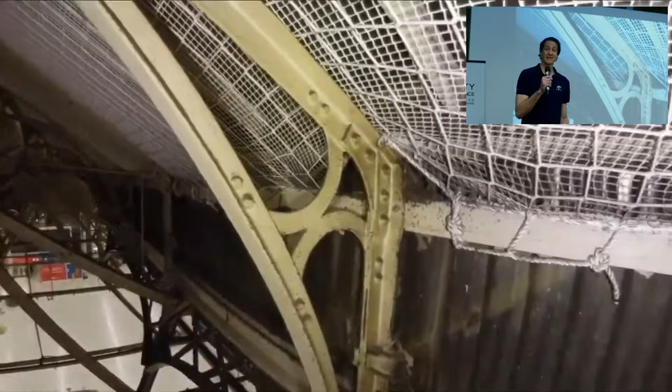This is just an extract from one week on LinkedIn, where some of you have been sharing how you are mapping historical sites like Alcatraz, doing landmark missions like in the Victoria train station, or doing all sorts of industrial inspections like inspecting boilers, the internals of wind turbines, inspecting shafts, and of course building digital twins of various assets, exploring tunnels, mapping out cavities and mines, and even in mines doing some pretty impressive missions doing the rescue of mining equipment that got stuck. You have been helping out in the collapse of a tunnel, inspecting sewers, or tunnel storm drains, or penstocks, and so many more things.

You are truly Flyability fans, and you are our heroes, because every day you are doing critical work. You're keeping safe infrastructure that all of society uses and is crucial.

So, big thank you. Over the last 10 years at Flyability, we've shipped more than 2,000 confined space drones, starting in 2016 with Elios 1, which was really a one of its kind. We introduced the first commercial drone that can fly indoors and collide into things and survive collisions.

Then we brought Elios 2 with a step change in ease of use and in terms of capacity to inspect as well. And then Elios 3, 2 years ago, with a big promise that it was a platform that we would keep building on top of.

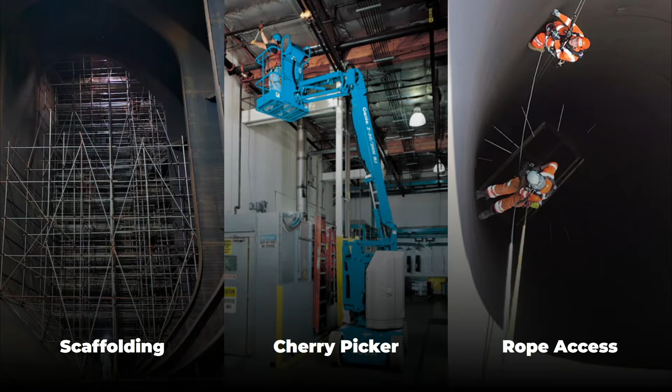So why bring UT on a drone? That's an easy one. Measuring the thickness of metallic plates or metallic components is the most requested data after visual inspection for the inspection of so many critical assets. And today, that sort of inspection requires work at height, building scaffolding, using cherry pickers, doing rope access. Here, with Elios 3 now having ultrasonic testing capabilities, and of course visual inspection capabilities, we are really bringing the ultimate inspection tool to many industries, like in the maritime industry, oil and gas, chemical, power generation, and so many more. We really believe we'll revolutionize many use cases.

Why UT on Elios 3 specifically? Well, Elios 3 is designed for contact. It's been 10 years we've built drones that survive collisions, that can handle contacts, which is really, really hard. And UT is a contact activity. So what is hard for most conventional drones is really natural for Elios 3.

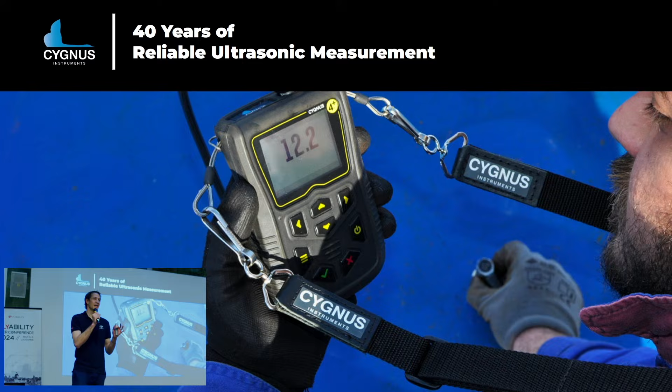This product would not have been possible without the amazing partnership with Cygnus. Cygnus has 40 years of experience in reliable ultrasonic measurement, and we collaborated very closely with them during the entire development to bring high precision, high reliability ultrasonic testing on this product. So thank you, Cygnus, for this amazing partnership and the years to come.

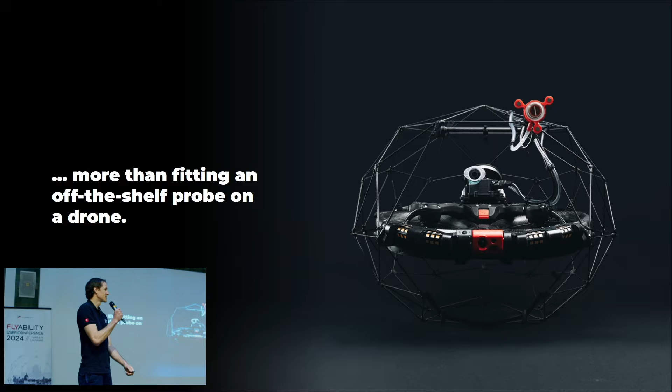Now, let me tell you, just zip tying a payload, a handheld probe, onto a drone is very easy. But making a product that allows you to be safely on the ground and feel like you're up there taking a UT reading, and be very efficient at that, is very, very hard. A lot went into this product, and so that's why I am super excited to welcome Stefano Zampieri, product manager for the UT Payload, who will tell you more.

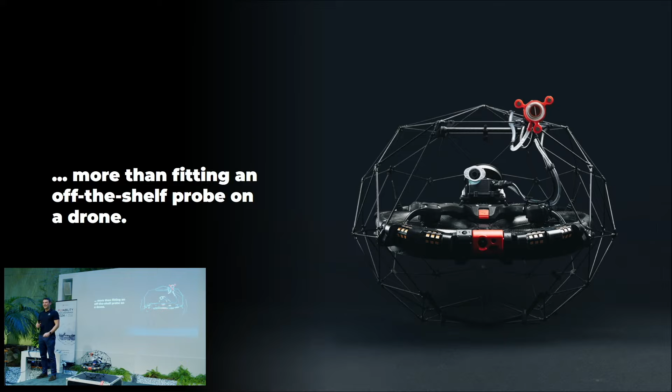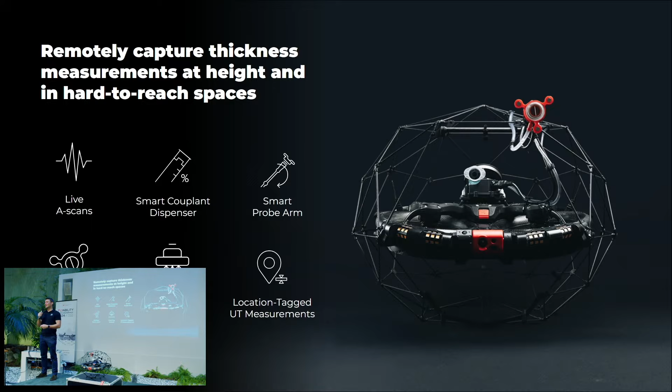So as you understood today, we are giving you the possibility of taking thickness measurements in confined spaces. So as Adrian mentioned, Elios 3 is a contact drone. It's very good at doing its job. But on top of that, we developed 6 main features that will allow you to perform flawless UT inspections. So I'd like to dive into each one of those features with you so that you understand a bit more what they are.

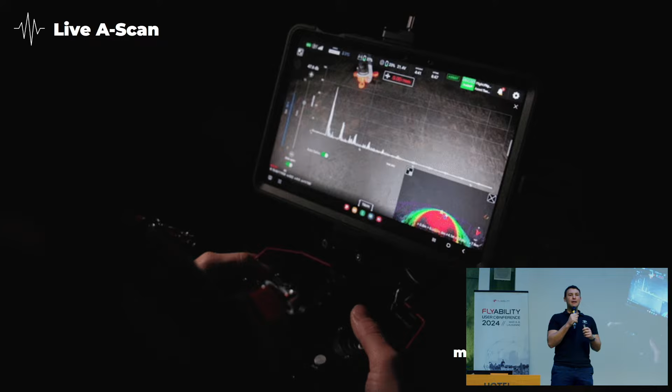So as a UT inspector, the most important point that you'll have is to make sure that your measurement is correct. So 5 years ago, when we started to fly our first prototypes, we realized that just a simple digital reading is not enough to trust your measurement. That's why we are sending 8 A-scans per second to the piloting screen so that the pilot can assess the validity of the measurement.

So it looks like this in real life. So we have the A-scan overlay on the piloting screen. We have the digital reading on top of the A-scan up there. And if you want to go further, you can even use the manual gates and gain to adjust and refine your measurement if needed.

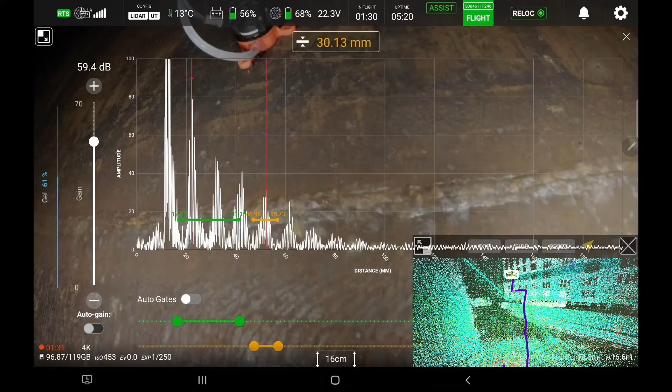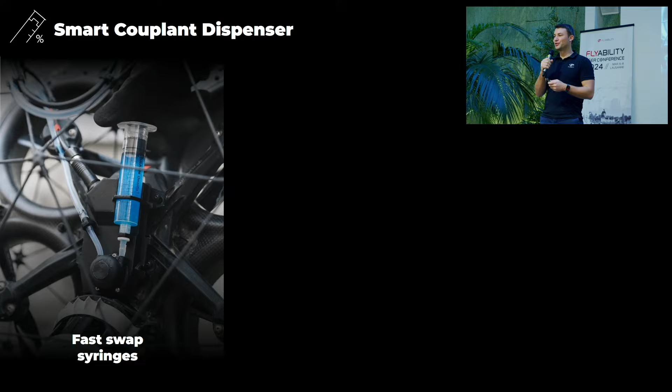So to get an A-scan at all, to start with, you need coupling. Coupling is an essential part of UT operations. And that's why we developed a smart couplant dispenser that is made of 3 main components. So fast swappable syringes to minimize downtime in between flights when you refill your tank. We also have a gel gauge on cockpit. So while you fly, you always know when it's time to come back and refill your gel.

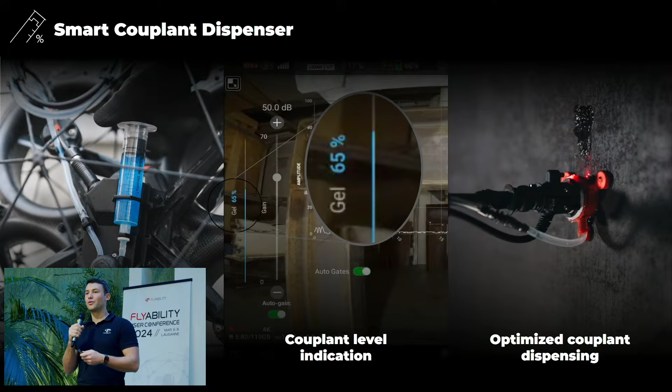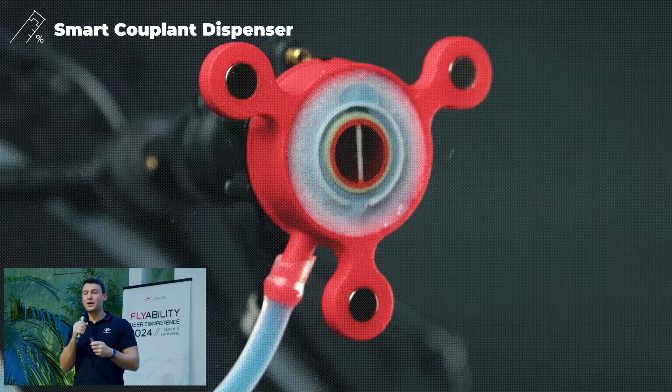And an optimized couplant dispenser, which, when you fly a drone, most of the time the drone is up there. You need to trust how the couplant is dispensed. And that's why our brilliant engineers developed this smart and very efficient system, which is just a lip around the probe that forces the gel in one direction to remove air bubbles and debris from the front of the probe.

When you use this tool, you will not only want to take measurements on vertical walls, you'll also want to take measurements on ceilings and floors. So that's why the probe can be mounted on top, in front, or below the drone for all those situations.

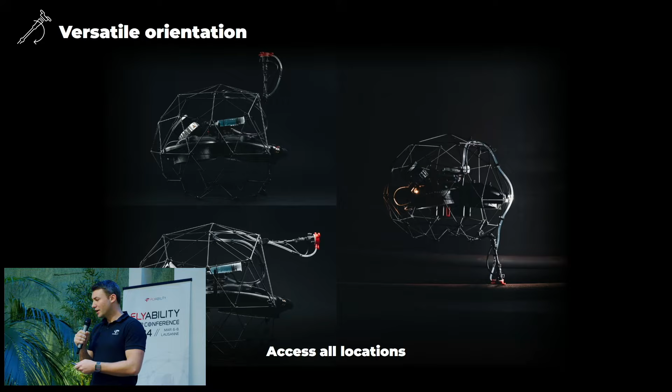But you can go further with this tool. For example, here you see a drawing of a pipe rack that one of our engineers made in the field. And in this situation, you need to take measurements in between the pipes where it's very tight. The drone cannot fit there. So you can shape the arm of the drone in different shapes to access all the inaccessible points that you'd like to take.

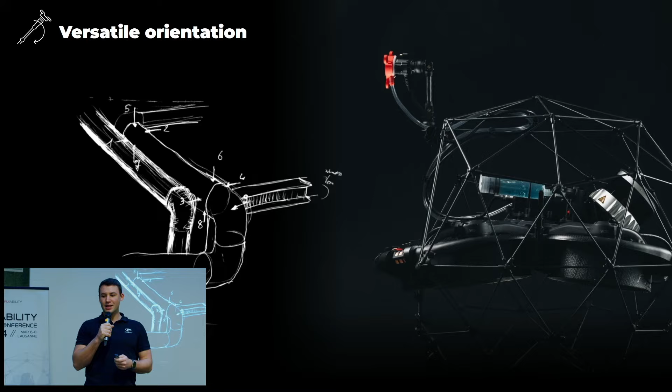We also added a laser in the probe. So, as a pilot, you can only look at your piloting screen and you don't have the perception of depth. But the laser creates a reference point on the wall that can be used by the pilot to adjust the position of the drone and hit a very, very precise target. You can see here how precise it can be.

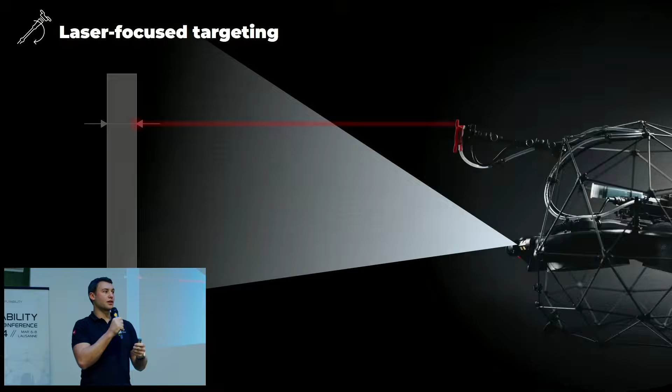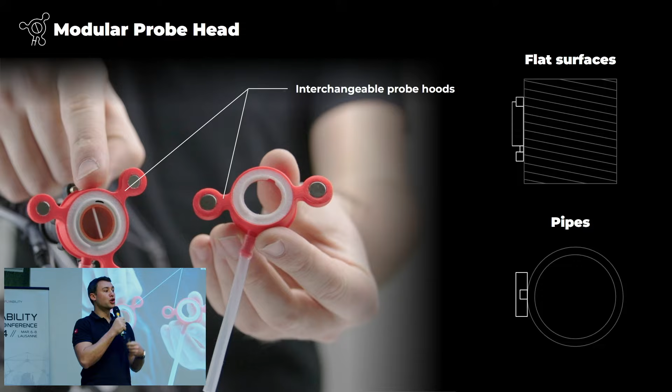So, you'll not only have pipes in your assets, you will also have flat surfaces. And that's why today we'd like to introduce the concept of interchangeable probe hoods. So this part goes around the probe and adapts the probe to the surface you want to measure. For example, for flat surfaces, you want a hood with 3 magnets that keep the probe very stable against the surface and perpendicular to the surface. For pipes, you want 2 magnets so that the probe is aligned with the axis of the pipe.

But today we are not only launching probe hoods, we're also launching interchangeable probes. For situations where you have thin walls or small pipes, you want to use the 7.5 MHz probe, which is more adapted for those situations. For general use, you have the 5 MHz probe. And for rough conditions where thicker walls or dirtier surfaces are there, you want to use the 2 MHz probe, which is more powerful.

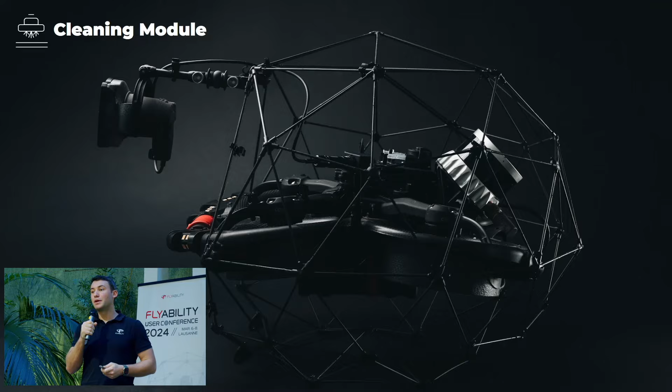But sometimes surfaces can get even dirtier than that, and the 2 MHz probe is not enough. In those cases, we have the cleaning module. The cleaning module is a metallic motorized brush that was optimized to be carried by Elios 3 and can be plugged instead of the probe on the drone, and then you can fly to your surface, you brush for a few seconds, and that's how it looks from the other side of the wall, and then you detach and it leaves a very clean spot ready to be measured.

I like this picture because it shows how thickness measurements today are noted, marked on the assets. It's very efficient and simple. However, this can be erased, and when I look at it, I have no idea when the measurement was taken.

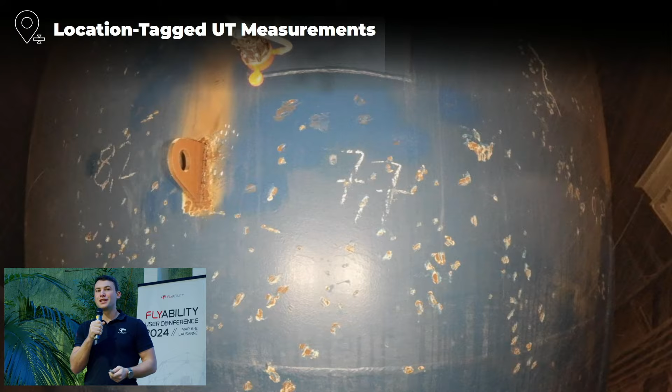So from today, you can mark digitally your measurements on the 3D map that Elios produces, so that you can come back even 2 years later on the exact same spot and compare your measurements.

The fact that Elios 3 can carry both LiDAR and UT also gives you a big advantage that we call situational awareness. So when you fly for the first time in your asset and need to take a measurement, for example, on a stiffener on the roof, well, all the stiffeners look the same, so only from the camera, how do you know you're on the right one? You can zoom on the map on the piloting tablet and make sure the drone is aligned with the right stiffener before taking your measurement.

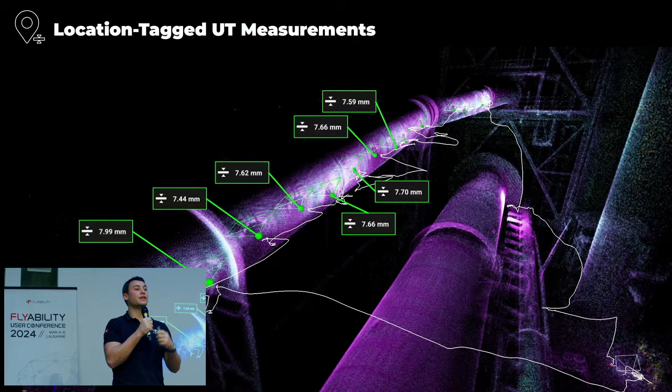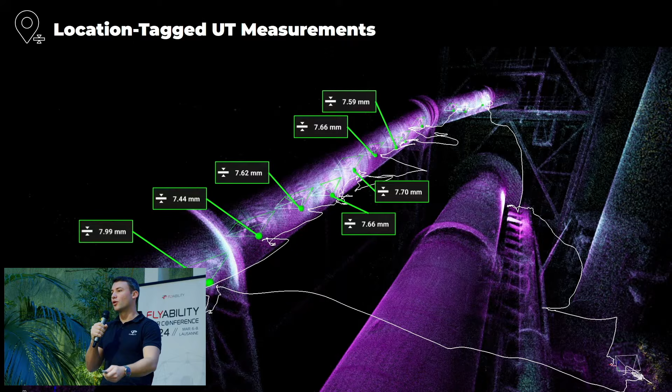So now we have all the tools, we go for our inspection, and all the flights will be recorded in the memory of the drone. We can go home, plug the drone to our computer, and use the Inspector software that goes with Elios 3 to virtually navigate in our asset, like in a video game, and relive our inspection.

The green dots here are our points of interest that we took during our inspection. If you open the UT tab, you can find all your measurements there. By clicking on the point of interest, you'll have the associated measurement directly. All the measurements are recorded, not only the ones associated to a point of interest.

So if you forgot to press this button during your flight, that's not a big deal. You can go back in the timeline and find every single A-scan and measurement that you have. You can also leave comments and criticality levels on the point of interest so that the next person using this tool and taking over your inspection can know what you were doing and see your comments there.

Now, to develop all that, we went on the field. We had many iterations, and I'd like to share with you 2 simple inspections that we did with the company Inspect Drone in Germany. The first one is this simple silo cone.

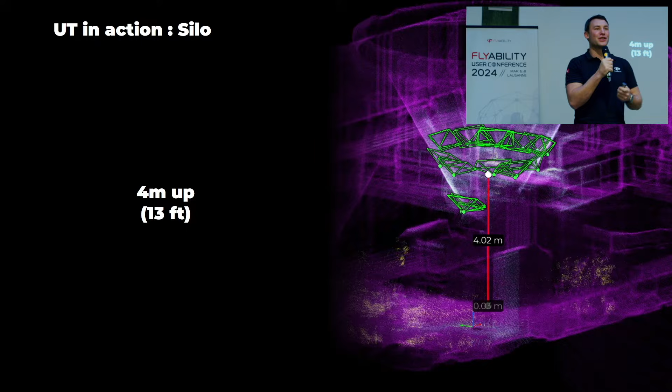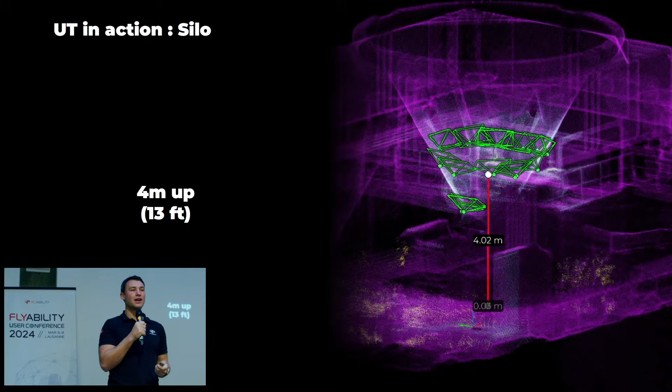We had to take 10 measurements on this silo. They were 4 meters high, so we can take measurement on the map. And 4 meters means probably work at height - you have to build scaffoldings, you have to think about it, and it's time and money. Here it was just one flight with the drone. You take off, you go around, you go in contact, and you get all your measurements in 5 minutes.

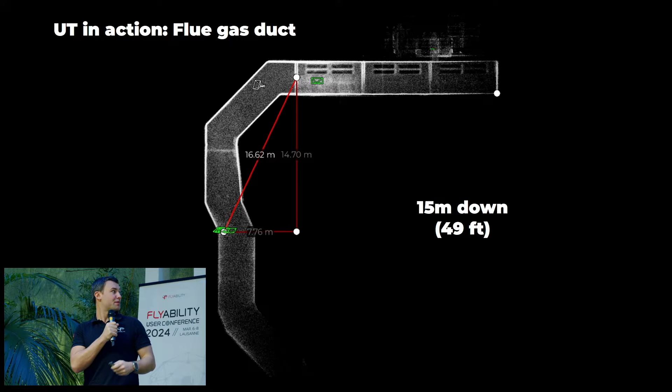The other example is this flue gas duct. It's a bit more scary. It was 15 meters down, the measurement that we needed to take. Without the drone, you would need to go on rope access down this pipe. It's cold, it's scary, you have debris that can fall down, and the structural integrity of the asset maybe was questionable.

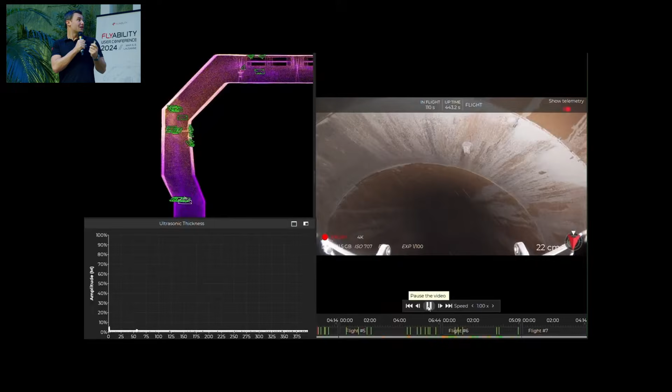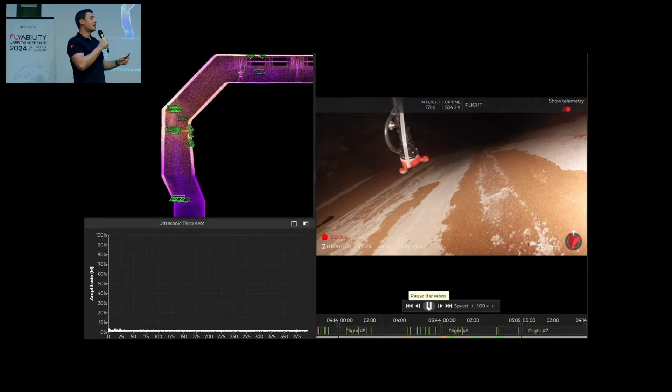So here, it's just a matter of flying down to the right section. You can see on the left, you can track the drone on the 3D map. Then go in contact and get your point, and everything will be stored on the drone. And then you can go home and have a beer with your friends.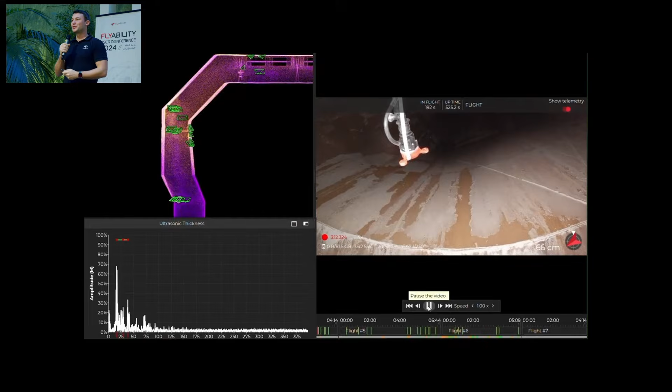So that video concludes my presentation, but I'm extremely excited to see what you will do with this tool and all the crazy inspections that you'll perform. Thank you.

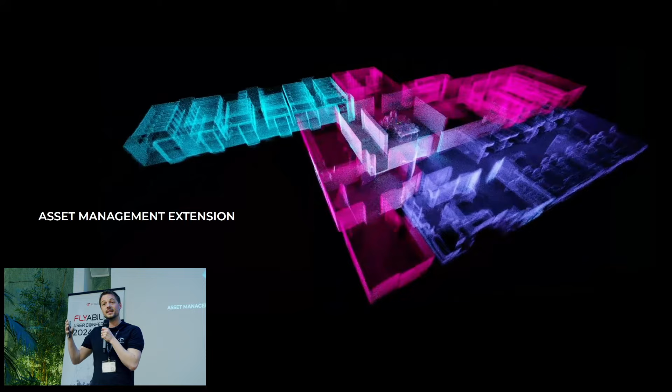I can feel the energy and the excitement about this new payload, but as Adrian said, we've got one more thing we'd like to share today. And this thing is software, and it's going to completely change the way you look at your data. This software is called the Asset Management Extension because it is an extension to Cockpit, the piloting app, and Inspector, the data processing software. It's a software that turns drone data into a consolidated view of your asset.

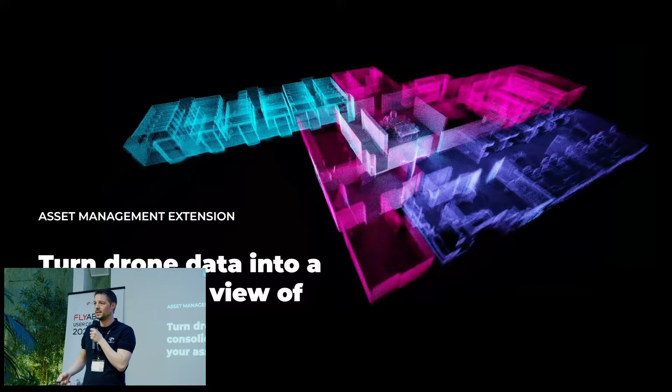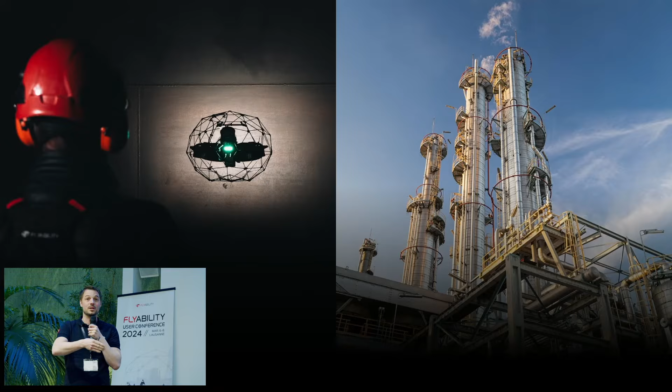What do we mean by that? If you're familiar with drone-based data capture, you know that pilots work one flight after the other, and each flight equals a set of data. But that's not the way asset managers look at their data. What asset managers are interested in is actually their asset and the state of their asset last time it was inspected. The Asset Management Extension is here to bridge the gap between those two worlds, the flight-based data capture and proper asset management.

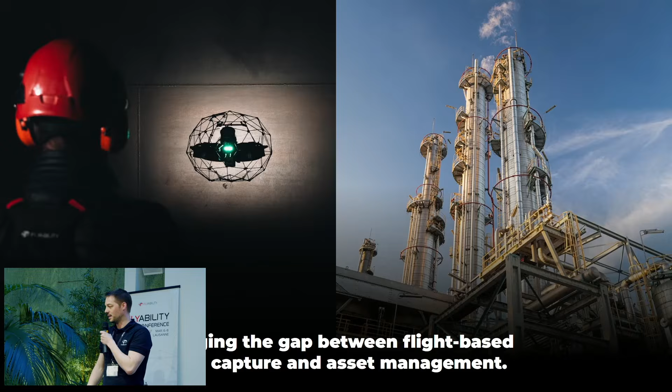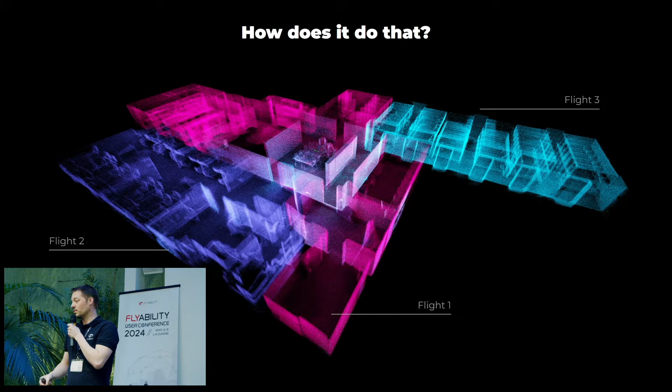Now, how does it do that? Well, it's quite simple. By organizing and merging subsequent flights into a single frame of reference so that all your maps and your points of interest are all aligned on the X, Y, and Z axis, and then they're aggregated with all the video into a single data set that represents one inspection.

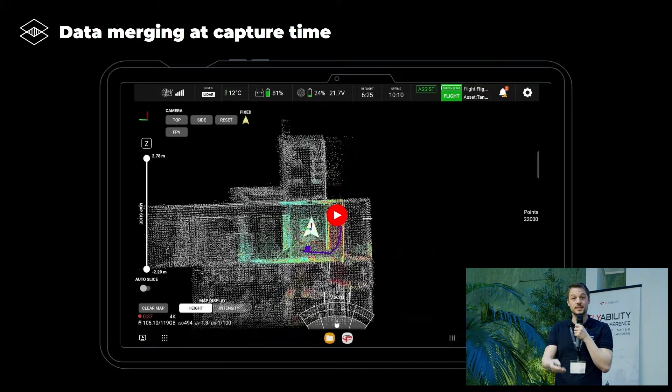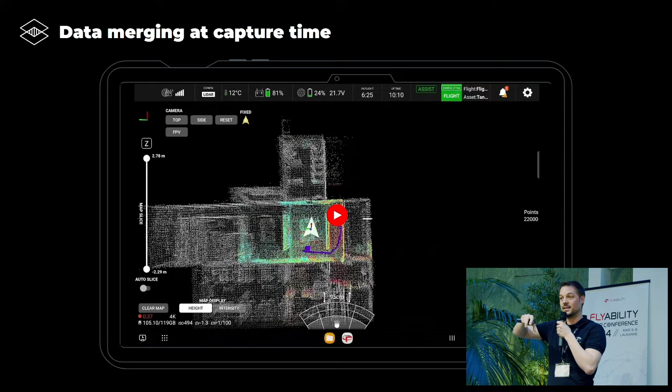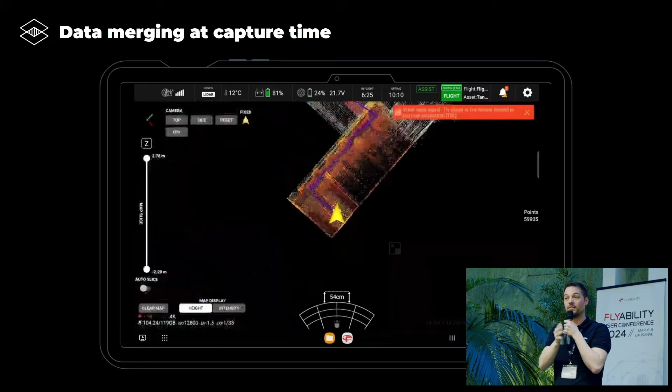How does that work in practice? Next time you go in the field and return to an asset you've already inspected, when you fire up the drone, you'll see a ghost map that was captured previously on your tablet. Before taking off, you'll perform a trick we call relocalization, giving the drone a chance to find its position within the historical map, so that when you fly, every data you collect is aggregated to that global asset map you've been building over time. This is how you aggregate all your flights into a single data set for the inspection.

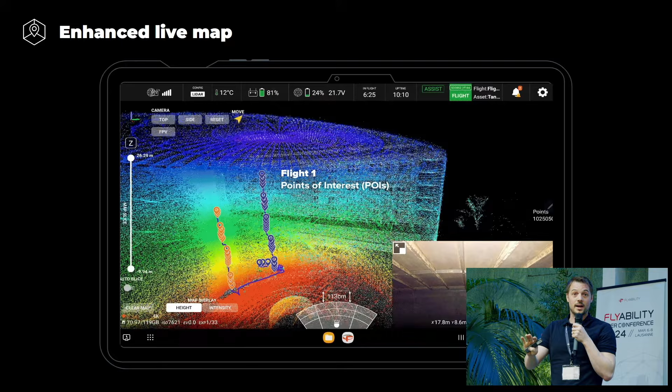Now, it's not only about the map. POIs, or points of interest from previous flights, will be visible as you fly further along in the inspection. This is extremely useful when you do an inspection that contains a lot of flights. Let's say you have 20 flights to perform, and you want to know which part you've covered and whether you've covered it properly. By looking at all the points of interest you've captured in previous flights, you'll be able to track where you stand within your inspection.

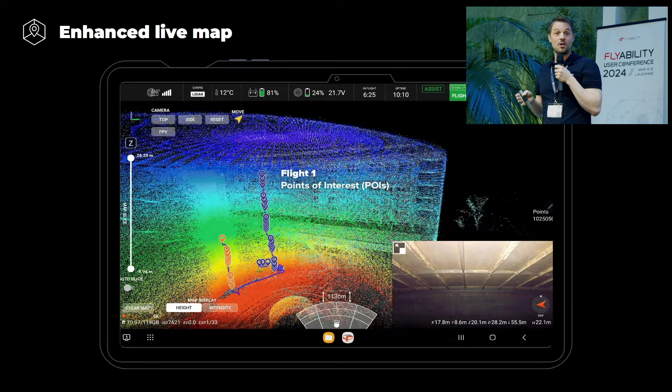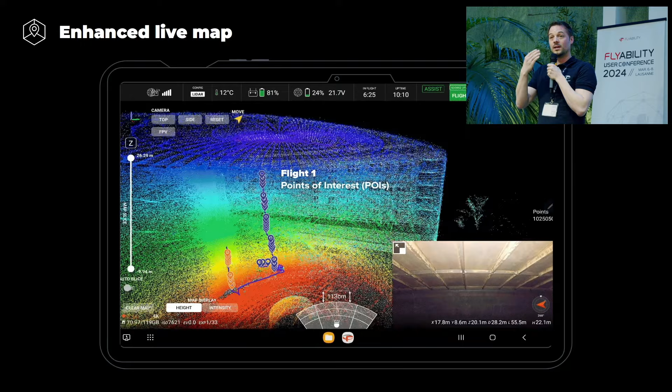If you've been in the field and done inspections, you know assets are not always open. They're open for a fraction of time, sometimes a few hours in the day. That's your moment to capture the data. And if you come back to the office and realize that part of the data is missing, well, it's too late. So we hope that with this feature and your ability to track inspection, you'll always be able to leave your site with a complete data set.

Now, this new software extension comes with a major release of Inspector that we call Inspector 5, where we have completely redesigned the way we organize data. If you've used Inspector 4, you know one flight is one folder with data inside. In Inspector 5, we've changed that completely, and we introduced the notion of workspace, so that you can switch from one project to another, or from one client to another, and get all your data loaded into the software, because each workspace contains a series of assets, which in turn contains inspections and then flights.

This is how the data is structured inside the software, and this better reflects the way asset managers actually look at data.

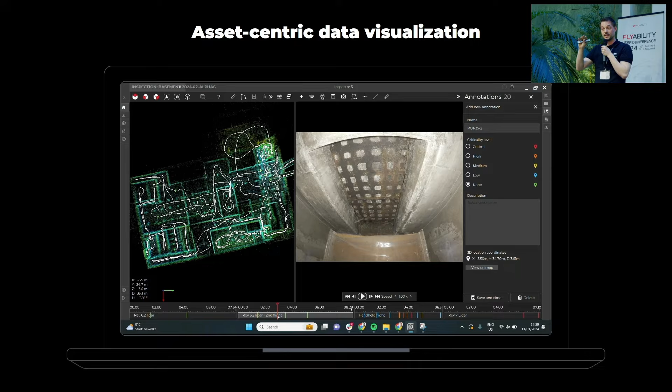Now, we've also redesigned the viewer, the data viewer inside Inspector. We call it the asset-centric data viewer, and it has a unified video timeline at the bottom where all the videos are aggregated and displayed in chronological order, so that you can review each video from a single interface and jump from one video to another.

We also revisited the feature where, when you click a point of interest, not only will it seek the right frame, but it will seek the right frame in the right video. So this way you really have a synchronization between the 3D model that you have with all your points of interest and then the visual data that goes along with it, and as Stefano mentioned, also the UT data, and so on.

All your flights and your maps will be displayed as a single map, but if you want to know which map belongs to which flight, you can still colorize flights or maps according to flights. And finally, if you want to work only on a fraction of your inspection, you can also individually select the maps and the flights that you want to display in the interface. So those are handy features that will help you review your data.

But we've also improved reporting. When you're done capturing data, reporting takes quite some time. Working with Inspector 4, you had to produce one report for each flight, then manually copy-paste the data into a final report, which is a long, time-consuming process. I'm pleased to say that now this is over. You'll have a single inspection, and you'll be able to work on all your points of interest from all your flights and produce one single report right from the data viewer.

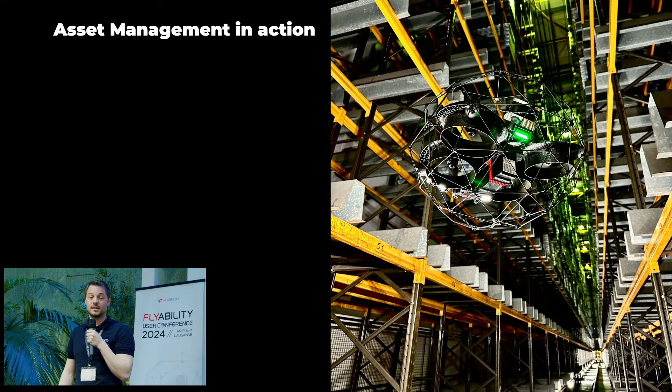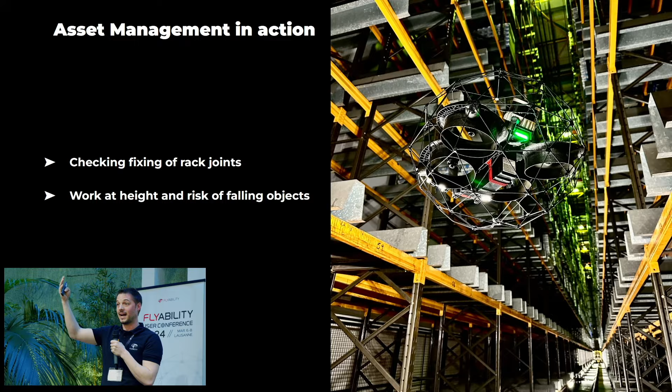So I'd like to show you some use cases to illustrate the benefits of this asset management extension. Here, this is a sugar factory. It's a warehouse in a sugar factory where the mission was to actually check all the fixing of the rack joints, right? This is a mission that typically involves work at height and a risk of falling debris and falling objects. So it's typically a good mission for Elios 3 because this warehouse is fully automated. Nobody walks in there usually.

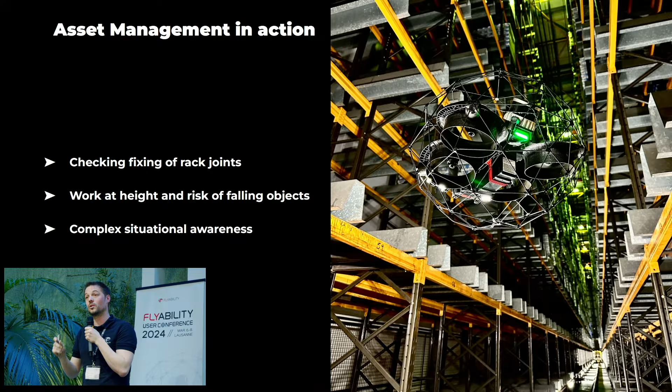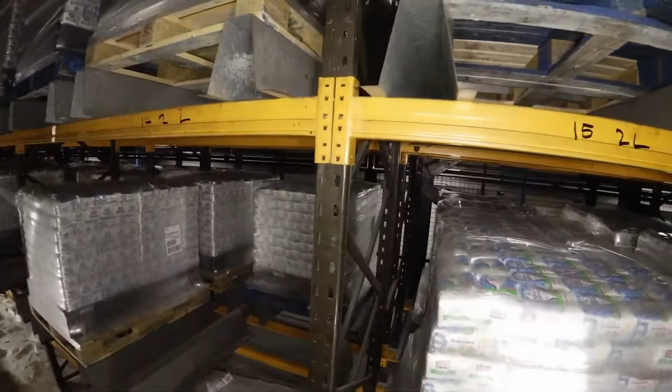But for an Elios 3, it can get very tricky in terms of situational awareness because look at that. This is how it looks in this warehouse. It's hundreds of meters of aisle where things are all similar. And you have to check any of the rack joints, as we'll see here. So that's really what the mission is about. Pretty simple. Checking, oh, we have the fixing there, no problem. Then going to the next joint, fixing is there. And repeat that task 1,000 times.

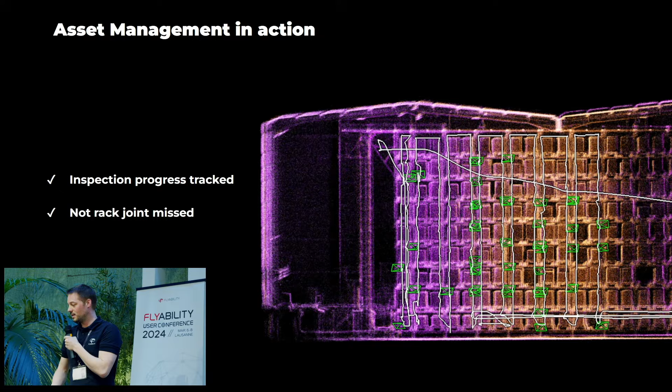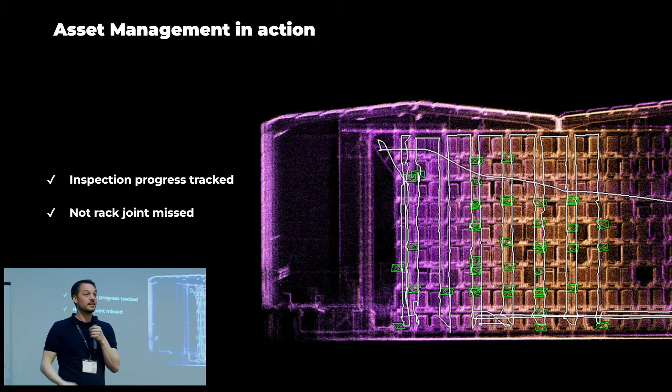So this client has used the asset management extension to track progress of their inspection, and they could ensure that when they left the site, they had checked every single one of those 1,000 rack joints. And I think this is really making an impact on what you can deliver to your clients.

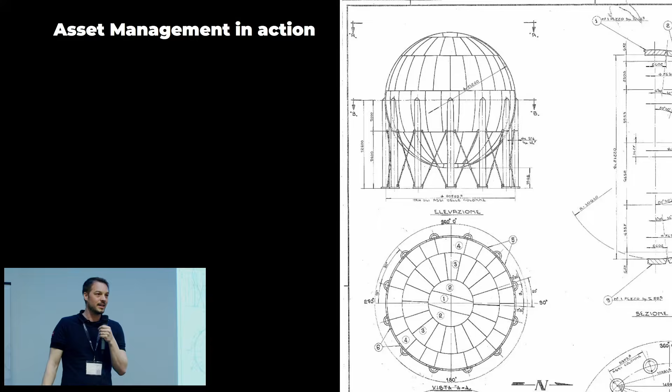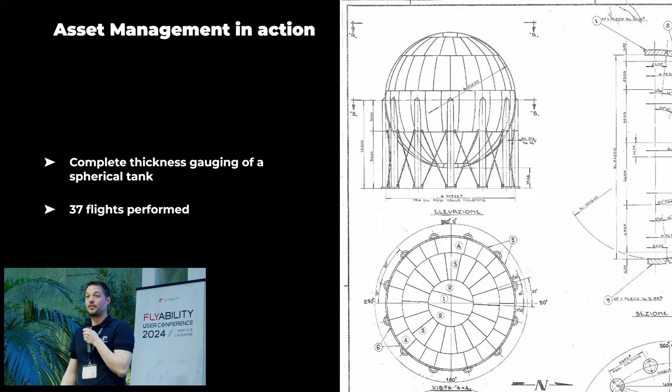Another inspection that I think is worth mentioning is this spherical tank that was inspected by Stefano while he was testing the UT Payload. So the goal of the mission was to complete a full thickness gauging of that sphere. This has taken 37 flights and ended up in almost 300 UT spots measured. And it's a task that you have to do one flight after the other, completing all those points that you have to capture. If you have to remember by heart, in your head, which points you've actually measured, it's impossible. So you need somebody else somewhere to track your work.

Here with asset management, Stefano was able to perform that alone. This mission actually took about a day. It actually took more time to get the permit to perform the inspection than doing the inspection. And this is a mission that usually takes several days if you perform that using rafting or scaffolding.

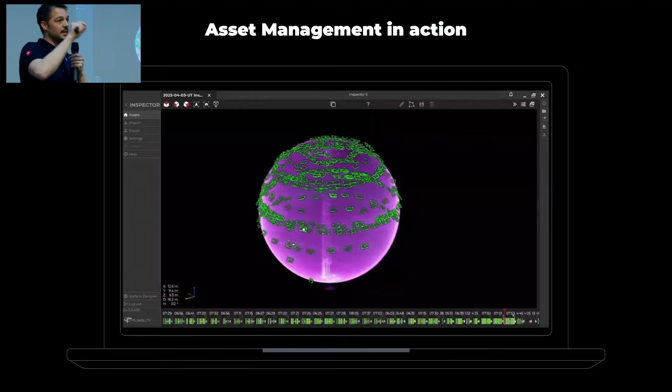I'd like to show you this video because this illustrates why we say that NDT will never be the same again after we launch these two products, because I think this is really what asset managers are willing to see eventually as a deliverable of the work you do. It's a full digital twin of their asset with all the data points pinpointed where they are taken, where you can easily click on one and get the information that is lying behind that defect.

And with that, we're concluding this product launch, and I'd like to invite on stage a few of our product advisors to continue our journey on UT. So I'm just going to introduce them to you one after the other.

Give me a second for turning on my phone. I need a few notes.

So, serial innovator, co-founder of Cyberhawk, and today CEO of Seabird, Malcolm Connolly has worked in the NDT business pretty much his entire life. And beside his unique ability to play bagpipe in cargo tanks to celebrate major achievements, we'll touch base on that in a minute. Malcolm is highly knowledgeable about the intricacies of NDT inspection in oil and gas and maritime industry. He's always ready to put our system to the test. And he's been instrumental in the development of the Elios 3 UT Payload, so we can't thank him enough for that. Please welcome Malcolm on this panel.

President at Osprey Integrity, Cortland has worked as an air ambulance and corporate pilot, as well as flight instructor for several years before turning to the world of NDT. He's a multi-ticket NDE, UT Level 2, certified API 510 pressure vessel inspector, among a lot of others, actually. And Cortland runs Osprey Integrity, a company based out of Cochrane in Alberta in Canada. It's a company specialized in aerial non-destructive testing, data collection, analytics. Please welcome Cortland to this panel.

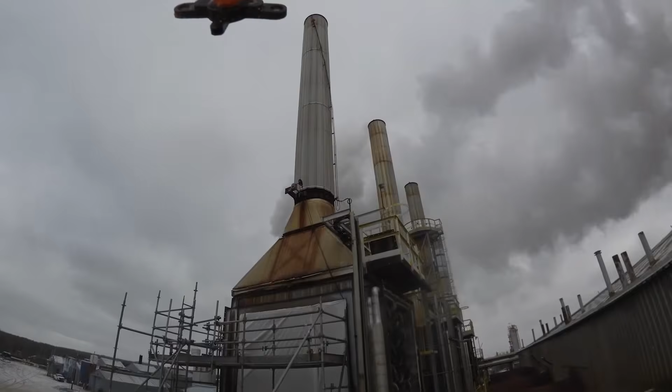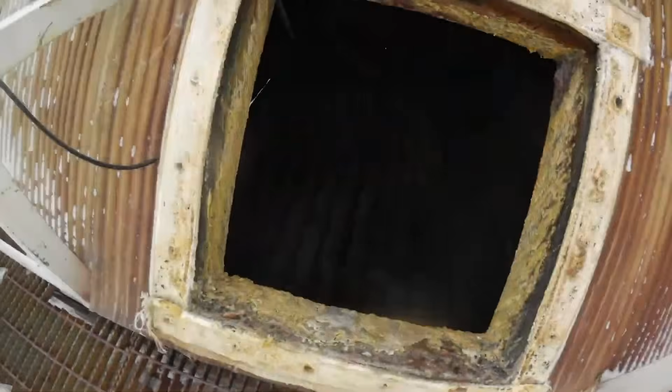So let me play that. So can you explain a little bit what that is? Yeah. So this is called a once-through steam generator. We've been using the Elios platform for about 3 years now to do the internals above the convection section. So now, you know, we've historically gone and seen things like dew point or general corrosion and just things that are of visual uncertainty. So yeah, this was with Stefano on a very cold tundra day. You were calling it the tundra, I think?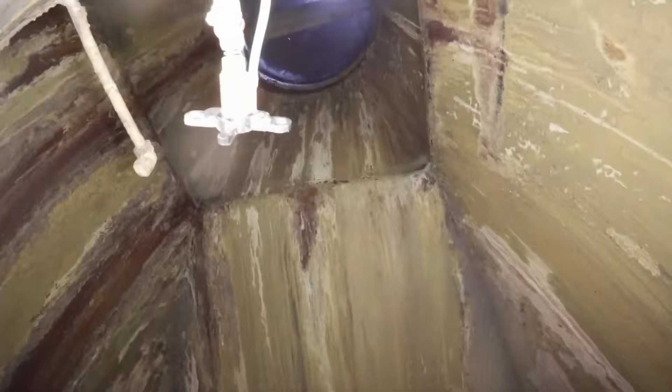Yeah. So this was obviously not the way it looks today, but going up through the damper of this stack because it is insulated. Just being able to go up and quantify, again, some of the thickness measurement to make sure that there's enough meat there that it doesn't fall over. Yeah. And you told me something about the type of gas and the corrosion. Oh, yeah. I'd be interested to know more about that.

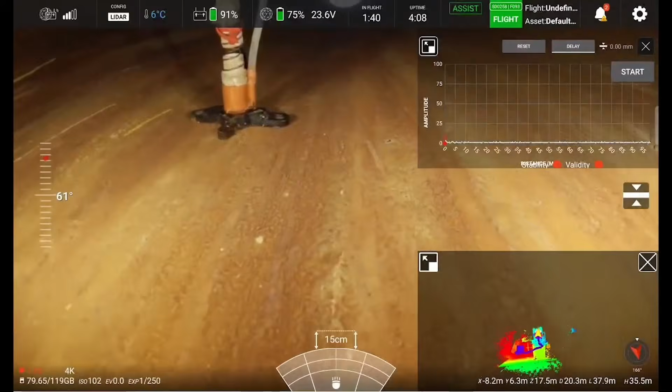In some cases, they use a gas to fire the boiler that has H2S or trace amounts of H2S in it. So when you get rain or moisture, you can have sulfuric acid develop by having moisture in the H2S mix. So what we see a lot of times in these stacks, in particular up towards the top, is a general corrosion mechanism, which spot thickness is totally fit for purpose for. Cool. And finally we get a reading. So you see it's quite a tricky access, but we finally get a reading in there, and amazing to see that.

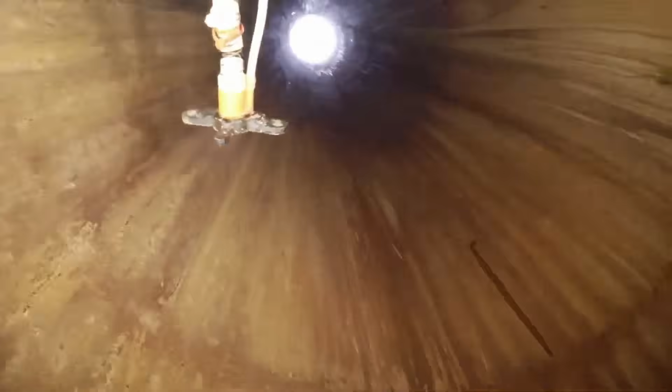Amazing. Thanks. Well, I got another video that I can skip through. Yeah, Mark, you sent me that. You got to tell us what's that. Seriously. So it's actually Mal playing bagpipes in a cargo tank. So what's up with that?

There's probably two main reasons. I'd say the first one was I'd run out of places to play without getting complaints from people about the noise. But the second reason, it was kind of a celebration for the culmination of quite a number of years of work with one of the major class societies, a vessel fleet operator, and Flyability and Seabird. We'd been working on the hardware development for the UT payload, but in parallel to that, the regulatory development and acceptance of the technology, because if you suddenly come out with a new piece of technology, to then go through the regulatory acceptance process would be another long time.

So we tried to do the two in parallel, and playing the pipes in the cargo tank was a celebration because Seabird had just been given the very first specialist vendor certification as an ESP hull gauging company that was able to use drones to do ultrasonic thickness testing for class survey. So that was the middle of last year, and that was after 4 years of working with the early stage prototypes. That's worth playing bagpipes in a cargo tank. Yeah, I think. Thank you.

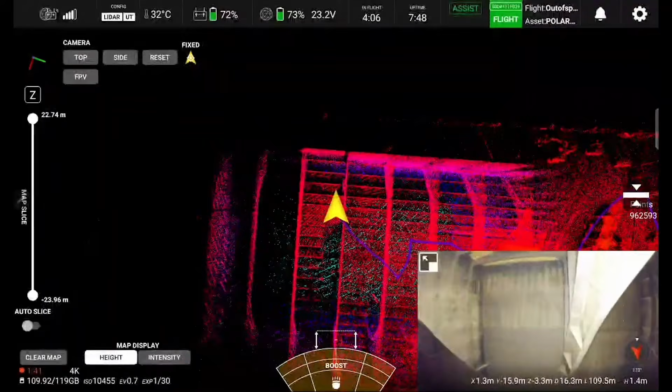But I think you sent me also this other video that shows some of the work you've done. Can you explain what we're seeing on those images? Yeah, so this is more of a demonstration video rather than how we would typically carry out the workflow. But what it was trying to show is that you can now perform a type of inspection, in this case the class survey of an oil tanker, by sitting on the deck. You don't have to go into the confined space. And because of the data localization, you don't need to physically see where the drone is, because like Stefano mentioned earlier, a lot of these structures are very uniform. It's easy to get lost. It's easy to not be inspecting the right part of the asset.

But with the combination of the laser scanner on the Elios 3 and the UT, you can now potentially meet the regulatory requirements without having to physically see the drone. Just to give you an idea, to get up to the area here, which is just under the deck plating, that would take a team of 15 scaffolders 2 days to build the staging, and that's passing every single scaffold through a little manhole. So it's a huge amount of work to get up there, and that's 2 minutes, boom, boom.

Yeah, and I think it goes beyond that, right? It goes way beyond that. A ship that is not at sea is a waste of money, isn't it? Yeah, absolutely. So typically, depending on the age of a vessel, our clients can spend up to $1 million on staging alone to carry out the survey, and they get nothing for that other than the certification. There's no new coating, no nice bit of mechanical work done. That's it. So a lot of Lego for not a lot. Their CFO must love you.

All right, Danny, you also sent me a few things. Starting with those pictures, I think they're interesting for a lot of reasons, but I'll let you tell us why.

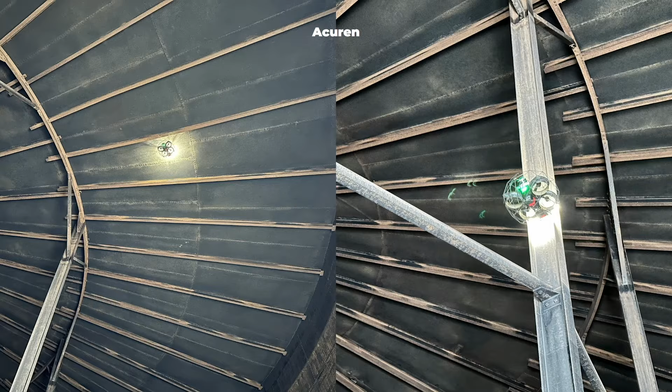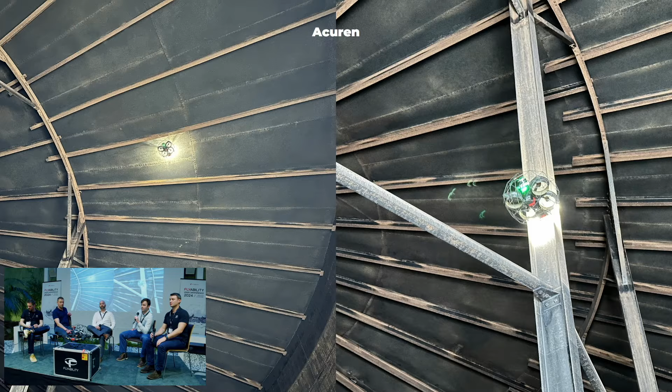So in these pictures here, I'm inside of a fixed roof tank. So versatility is really the message here. We're able to adjust the probe and fit into areas that otherwise would be very difficult to get into. So Stefano talked earlier about the adjustment of the probe, the mounting locations, and really the key here is establishing a workflow so you can complete your job as efficiently as possible, right?

So if you're doing this I-beam here, for example, you'd want that forward-facing probe, but you can also go into an I-beam and turn up and in, the same way we talked about the pipe rack. So it's almost like that human arm, again, going up and into the pipe rack, where traditionally if it was a fixed mount just in the front, you would be stuck just going straight forward or straight to the side. But reality is we have lots of tight spaces, which goes back to the mantra of Flyability: accessing those inaccessible places, and the product is designed to do that.

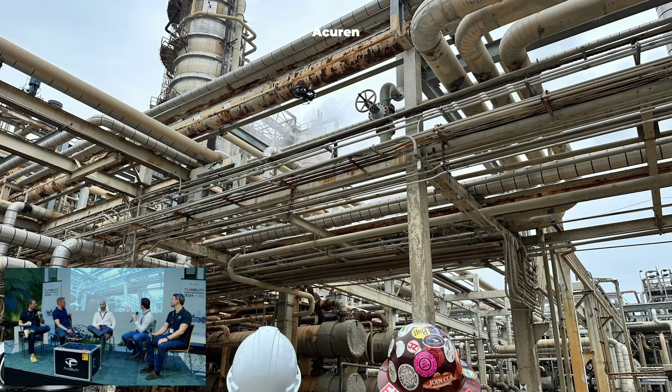So in this case, again, it's similar to a lot of the other examples we've seen, where you're able to go and cover these large areas that otherwise would be very expensive. It looks a lot like Malcolm's example. It's just not floating in the water. You also sent me that saying this was one of the key aha moments for some of our clients. The drone is actually up there if you can't see it, right?

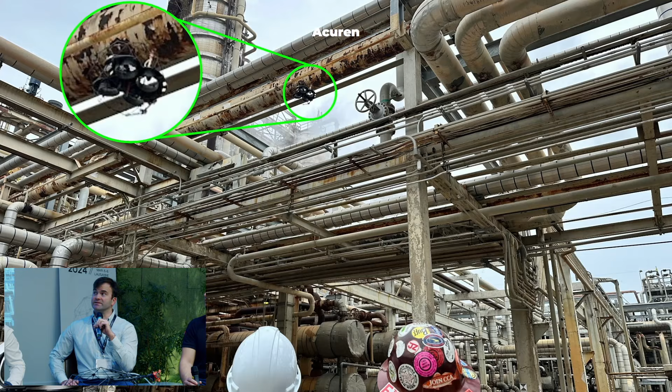So UT for pipe racks is really what we're talking about here. We all know that in the facilities where we work, we have miles and miles of pipe racks. Everybody's facility has it. It's transporting some sort of product. People tend to say that NDT is the art of keeping the liquids inside of the pipes that they are meant to be inside of. The containment type of mentality, which is obviously important. So in this case, we're aiding that high volume inspection, right?

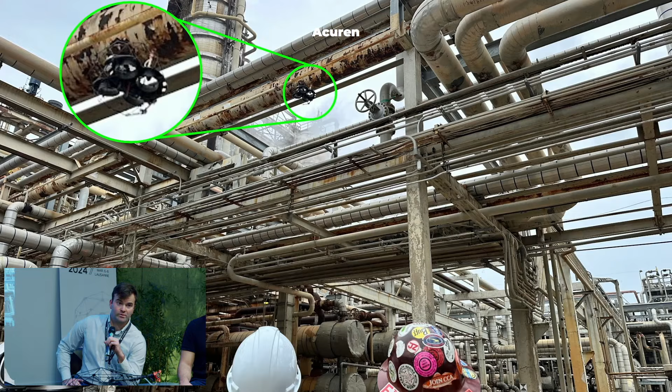So think about how many miles of pipes you have. Think about how many readings you need on those pipes. Think about how many inspectors we have just in our company doing those sorts of things, and scale that to the world. And this is really the most powerful use case that I've seen. So in this case, we're able to fly up and go to non-insulated piping and get readings however we would like. We don't have limitations based off scaffolding position. We don't have limitations based off access. So lots of versatility here as well.

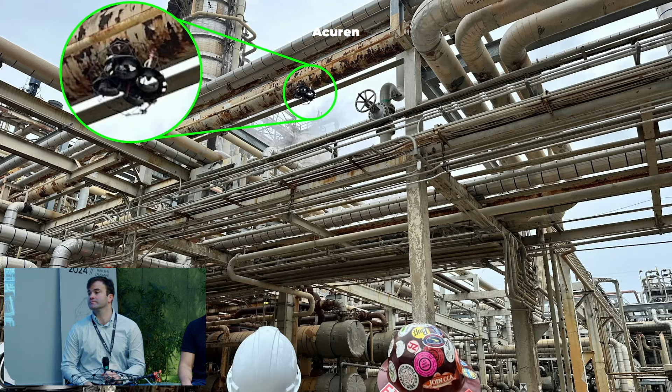And maybe hinting back on my first question, you told me one thing that I found very interesting when we discussed earlier. You said that with visual inspection, your drones were up in the field pretty much 3 months in a row, fully loaded, and then kind of sitting on a shelf waiting for the next shutdown because the type of work you can do is limited. Is this going to change that for you?

Yeah, thanks for bringing that up. So the Elios traditionally has been somewhat lumpy, right? We have enough work where, for the most part, we have outages for the entire year. But as everybody knows, it's seasonal, right? Everybody wants to do outages when it's not in extreme temperatures, hot or cold. So in this case specifically, what this enables us to do is to have stability of a workload with this product, right?

So whether you're an asset owner and you want to implement this into your everyday activities, or if you're a service provider, it's something that you can consistently use every single day. It can supplement existing data. It can replace the way you're doing things right now and do it much more safely. So it's a win all the way around. I'm all about win-wins and win-win-wins, and this fits in that bucket.

Yeah, thanks for commenting on that. Now, we haven't heard from you, Stefano, but I didn't ask you to send me pictures because you sent me a truckload of things already, and I couldn't put them all here. But I think you've tested in so many places during those 5 years. Can you tell us some of the craziest places you've been testing that thing? Okay. Well, yes, I can.

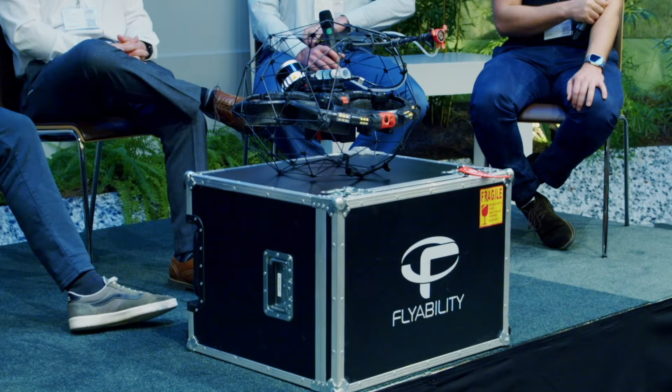So you have what Cortland talked about, being able to do B scan, C scan, corrosion mapping, and then going into multiple probe head phased array. That would be the following step, and then you've just about got to the complete pyramid. Yeah, there'd be very few tasks you couldn't do.

And I know you've been a big supporter of the workflow of capturing this data. I think you had a few ideas that you shared with me a few days ago regarding the workflow of data and how this could be extended further than the drone, actually. Oh yeah. Do we want to talk about that just now? You can.

Previously, the way UT is done by hand is fairly archaic in the reporting procedure and the recording of data. If you take the flying part out of what the Elios 3 is able to do with UT and create some sort of product that worked by hand for a normal inspector - this covers maybe 10-15% of the areas on a ship for ship inspection, the rest is all done by gauging by hand - but the workflow with this is way better than the traditional inspection. So you're working with two different workflows. You could have the whole workflow done with a device that's recording, 3D scanning your environment and taking points, like a cuff with the LiDAR on your wrist.